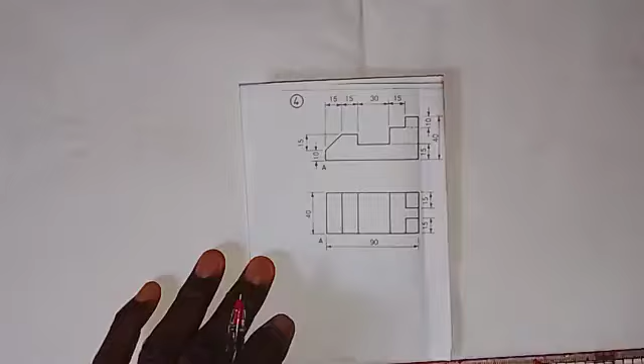Here we are going to be working on the conversion of these orthographic views into isometric view, as we are given these views in first angle orthographic projection. This is the front elevation and this is the plan. And let's talk about the dimensions on the front elevation.

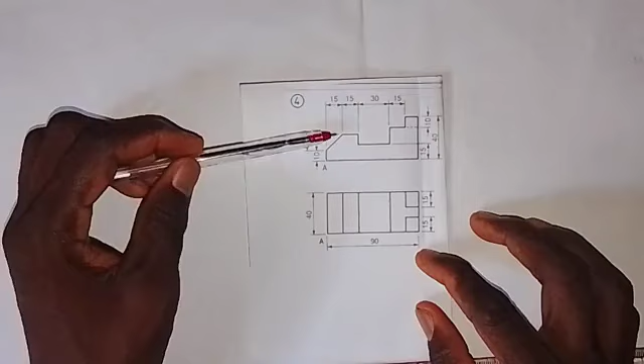So we have that from here to here is 10, from here to here is 15, from here to here is 15, from here to here is 15, from here to here is 30, from here to here is 15, and then the distance from here to here, we shall get it by adding these together and subtracting the result from 90 millimeters, as we have that from here to here is 90.

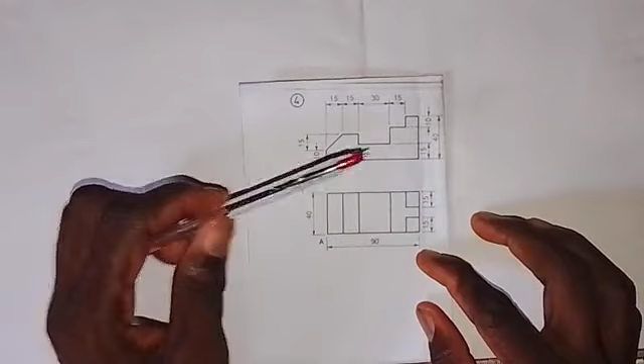Okay, and then we have that from here to here is 15, from here to here is 10. The total from here to here is 40 millimeters in the plan. So we have the total length is 90, and from here to here is 15, from here to here is 15, and from here to here is 40.

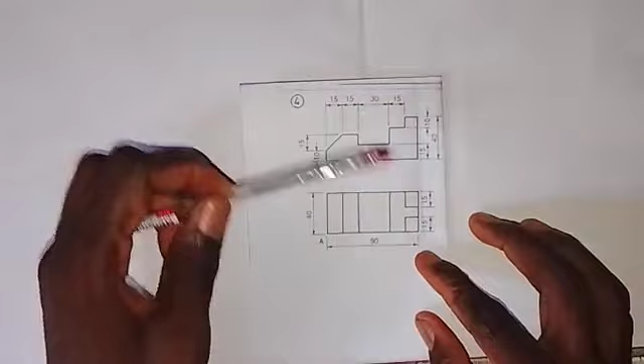Okay, so what we are going to do first is to work on the front elevation. We make the isometric view of the front elevation. Once we are able to get that done, then the remaining part will come out with ease. So let's start. We also need to take note of the lowest point. It is indicated with letter A here, and we can also see it here in the plan.

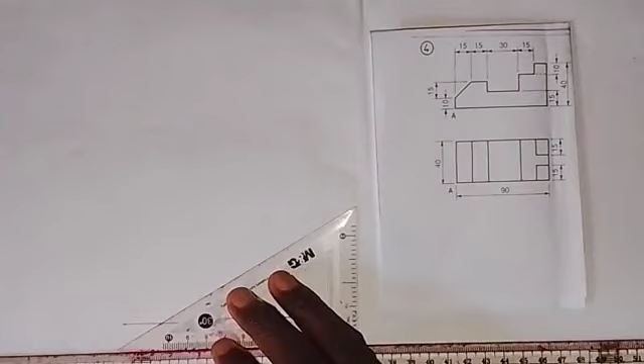So what we are going to do is to draw a short horizontal line here, and then I will take my 30-degree set square, set it at this point. Then I'm going to draw a line in this direction, and then at this point I will draw a short vertical line. So we have this now.

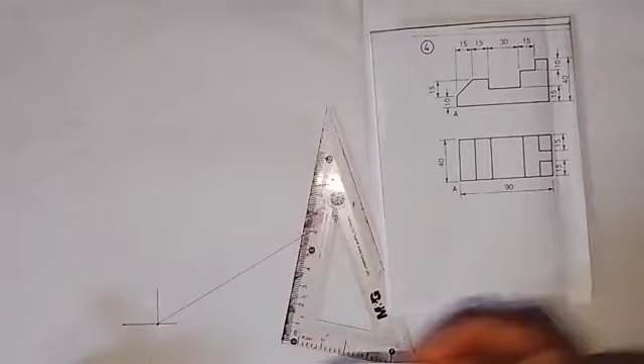Alright, so I'm going to take a measurement of 90 millimeters, which is the distance from here to here. I'll take 90 millimeters from this point to this point here. So this is 90 millimeters. Then we also need to indicate the lowest point A. So I need to write A at this point. So that is the lowest point.

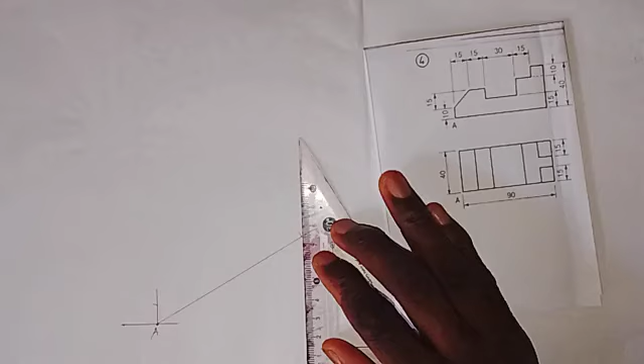And also I will take a measurement of 10 millimeters on this line, which is for this particular small line that we have here, 10 millimeters. So this is 10 millimeters here. Then I will now come to this point here and draw a vertical line at this point. So we have it like this here.

Okay. So on this vertical line, I will take 40, which is the distance from here to here. So take 40 millimeters. So here we have this to be 40 millimeters. Then I want to draw this line that we have here.

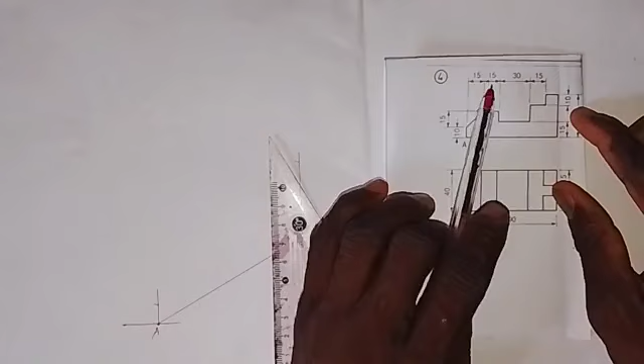So for us to know the distance from here to here, let's add these together. So 15 plus 15 is 30. 30 plus 30, that's 60. 60 plus 15, that's 75. So if you subtract 75 from 90, that will be 15. So it means that the distance from here to here is 15 millimeters. So I need to take a measurement.

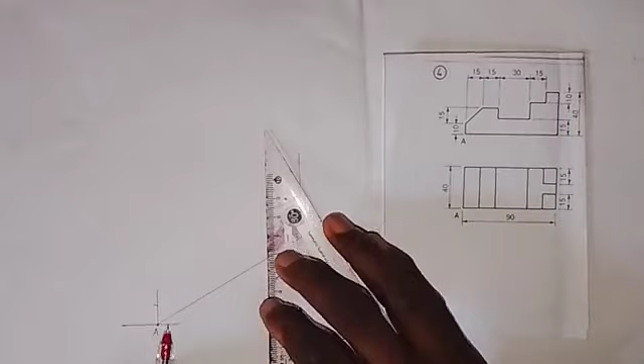Okay, before that, sorry, I need to draw a line. So for us to draw this line that we have from here to here, I'm going to draw a line at an angle of 30. So setting my set square like this, I will draw a line from here forward, and I'm going to take a measurement of 15 millimeters from this point forward.

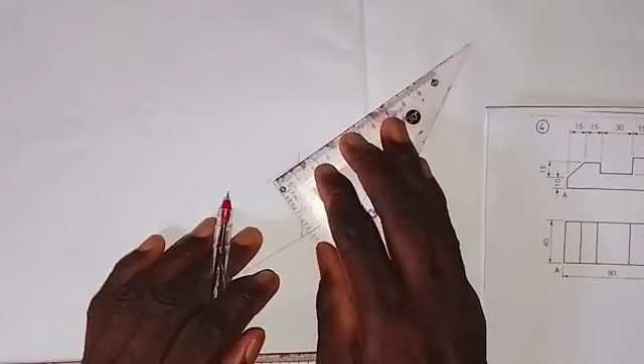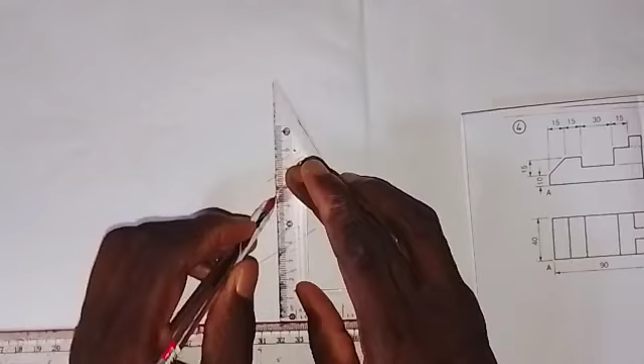So this is 15 millimeters, and then we have a vertical line that comes down like this, which is 10 millimeters long. So I will draw a vertical line at this point like this. And then I'm going to take a measurement of 10 millimeters. This 10 millimeters that I took is for the distance from here to here. Then we need to draw this line.

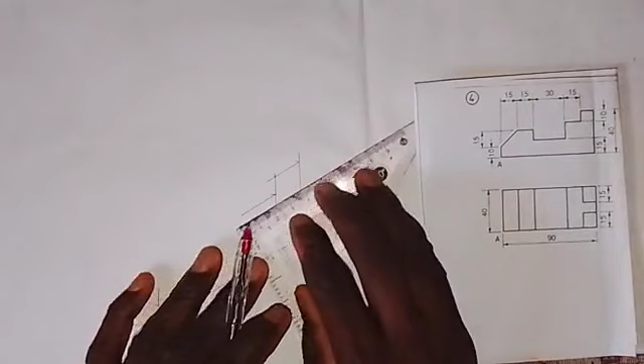So I will come to this point here, setting my set square like this. I will draw a line in this direction, and don't forget that that line is 15 millimeters long. So from this point I will take 15 millimeters forward. This is 15, and also we have a vertical line that comes down here. So I'm going to set my set square like this and draw a vertical line down like this.

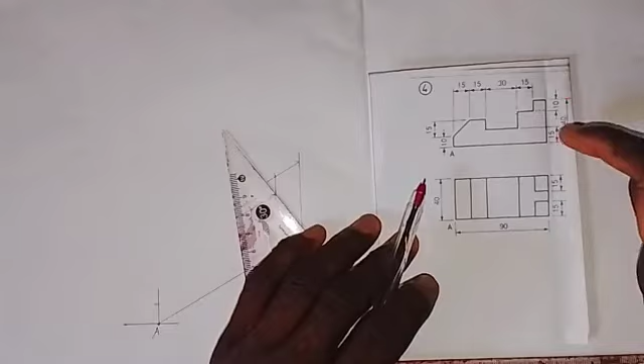Okay, so what is the distance from here to here? Okay, let's look for it. The total from here to here is 40, and we are told that from here to here is 10, and from here to this level is 15. So it means that if we add 10 plus 15, that will give us 25, and then if you subtract 25 from 40, that will give us 15.

So we take a measurement of 15 millimeters down from this point here. So this here is 15 millimeters, and then we are going to draw this horizontal line that we have here. With the set square set like this, we draw the line so it comes forward like this, and we take a measurement of 30 millimeters on this line from this point.

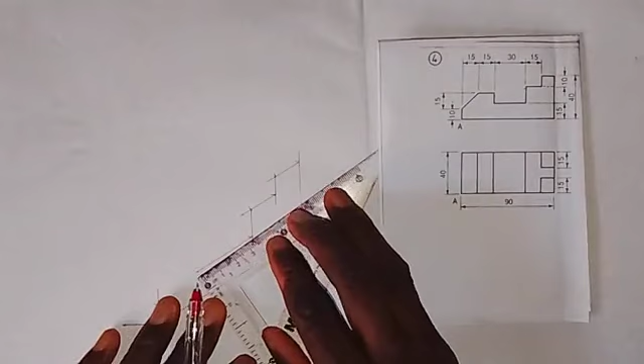Take 30 millimeters forward, this is 30 millimeters, and then we are going to draw a vertical line up from this point here. Okay, so we take that vertical line, so the vertical line goes up like this, so we have this now. All right, so then there's something that we need to do.

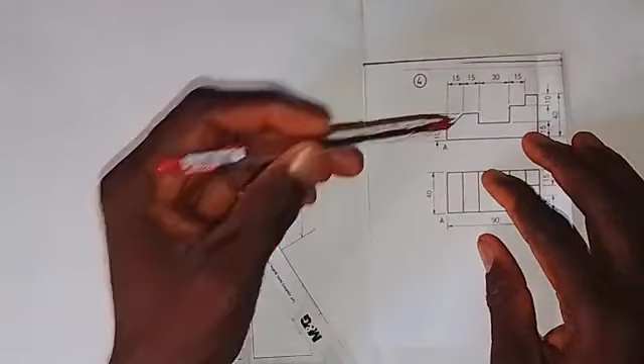Okay, so what is the distance from here up? I'm looking at this distance. So if we have that from here to here is 10, and then from here to here is 15, I'm looking at this distance to be 10 millimeters. From here to here is 10 millimeters. So I'm going to take a measurement of 10 millimeters up from this point.

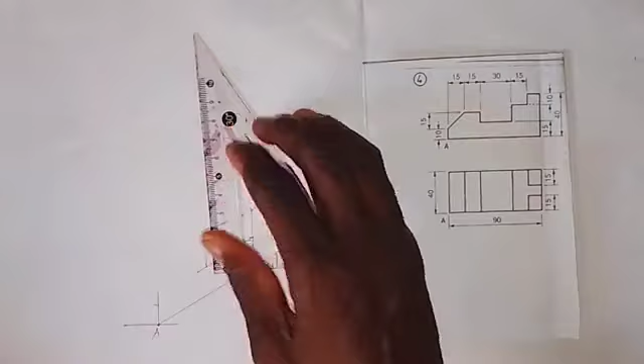This is 10 millimeters. So at this point, I'm going to draw a horizontal line. That is this horizontal line that we have from here to here. I will draw it forward like this, and then we take this 15 from here to here. So we take 15 millimeters forward here. So this is 15 millimeters.

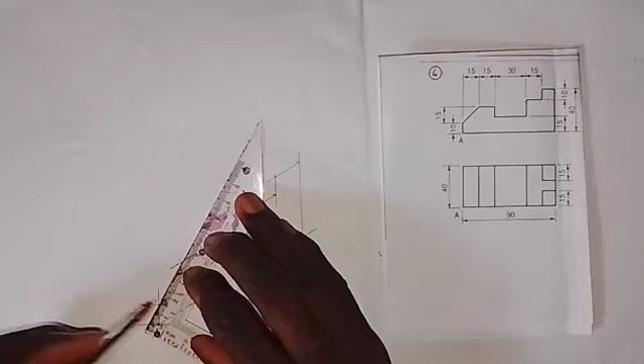So we now have that this line at 15 is connected with this line at 10. So I will join them together. Just join these 2 points together. So then we have the front elevation produced in isometric view. So what is the next thing that we have to do to make it an isometric block?

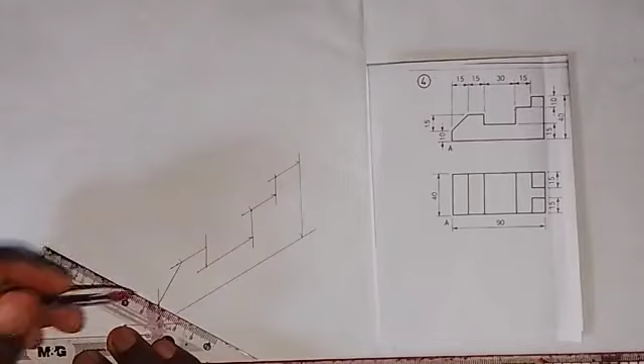So we are going to take the set square. We set the set square in this direction at this point, and then we draw a line in this direction. Then we come to this point and draw a line in this direction. Also, we come up here and we draw a line in this direction. Coming to this point here, we also draw a line in this direction. I will come to this point.

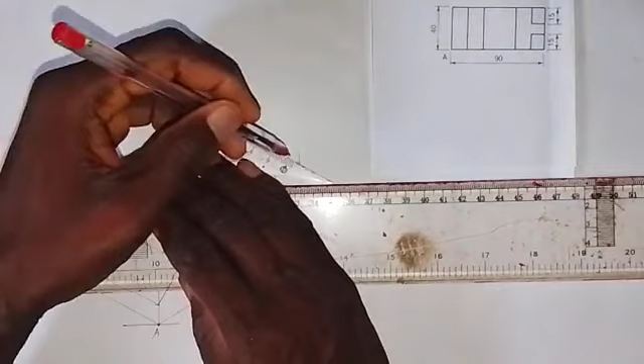Okay, just look at me. So we draw a line in this direction. I will come up here at this point and draw a line in this direction. Then I will come here also and draw a line in this direction. I will come up here and draw a line in this direction. I'll come up here also, draw a line in this direction. All right, so we have all this.

So what we are to do now is that we have that from here to here is 40 millimeters. Just come to this point here and take a measurement of 40 millimeters from here forward. See, this is 40 millimeters. At this point, draw a vertical line like this. Okay, then you can't just draw a line from here to connect to this line.

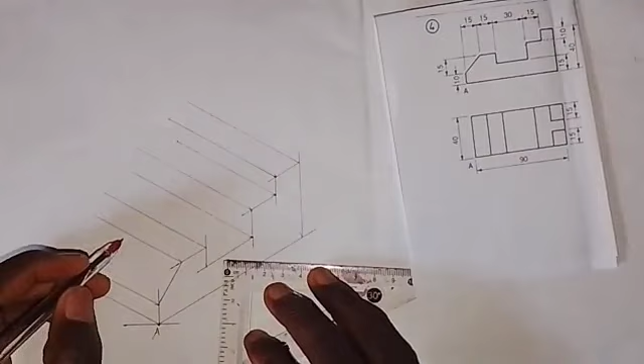You have to come here again and take a measurement of 40 millimeters. Take 40 millimeters. Okay, then we now connect this together. So we join these 2 points together like this. Then I will now come here, setting my set square in this direction. I will draw a line to connect with this.

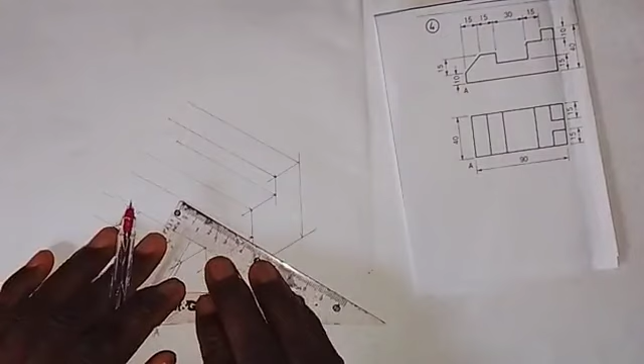Then here I also need to take a measurement of 40 millimeters from this point to this side. You can't just join them like that. Okay, so I will now come here. If I draw the line, the line will go like this. So draw the line forward like this. This is how you can do it so that the shape can come out very well.

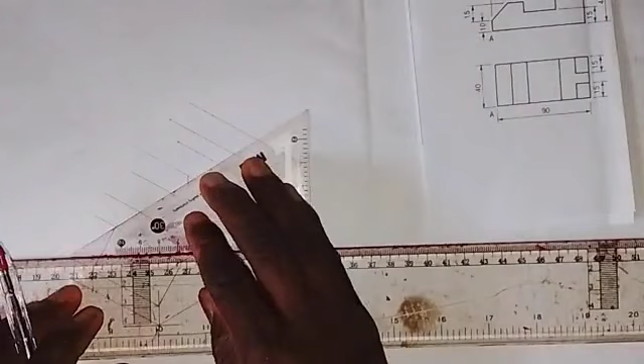Then coming to this point here, we draw a vertical line up here. And then at this point I will set my set square like this and transfer this point onto this line, and for this I will set the set square like this and then draw a vertical line, and then I will set the set square like this at this point, and then I will connect this together. All right, so you can see what we have right now.

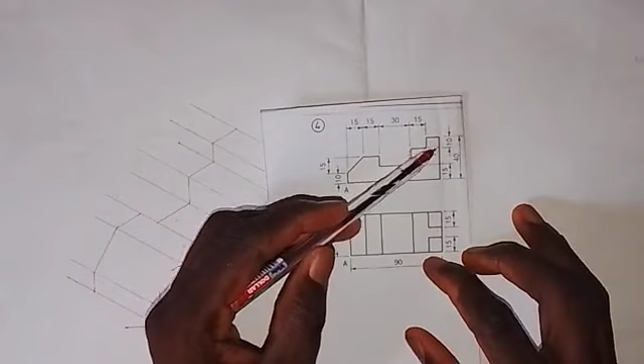Okay, so then we have a feature. So here in the middle, that's why it is hidden. There's a cut in the middle here that is hidden from us, and the depth is 10 millimeters, which is the 10 millimeters we already took from here to here. So what we just need to do is bring out the shape here.

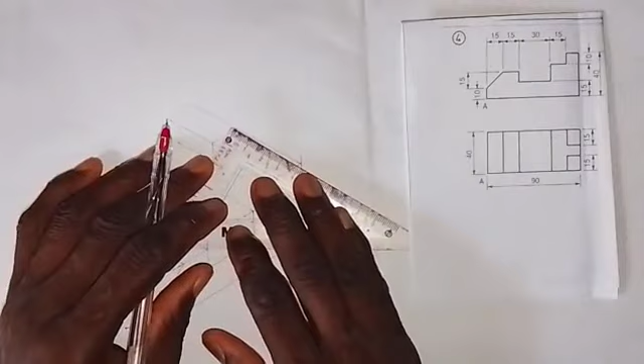So the total is what? The total is 40 from here to here. Then we have 15 from here to here, 15 from here to here. So let's take that 15. Come to this end here, and we take 15 millimeters forward, 15 millimeters to this side. This is 15 millimeters. Then I'll just take 10. So the rest is what?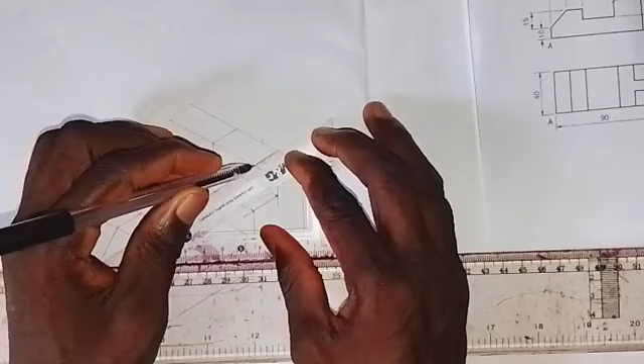Is 15. So what I need to do now is, from this point, I'm going to use my black pen to make it a thick line. Okay, so I make it a thick line at once from here to here. I will come to this point and also draw a line like this, making it a thick line. Then I will now take it from here.

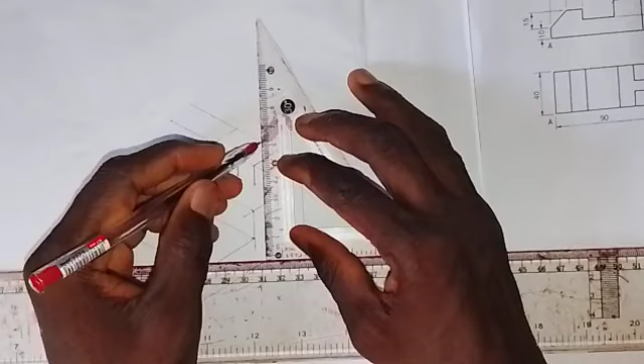Okay, I'll take it from here and then draw a thick vertical line down like this, and then I'll come here and also draw a thick vertical line down, and then at this point here, let me just draw it like this, and then I have to come to this point. Okay, so I can make it a thick line, so I will draw a line from here like this. So this line has to be drawn. Then let's make this a thick line at once.

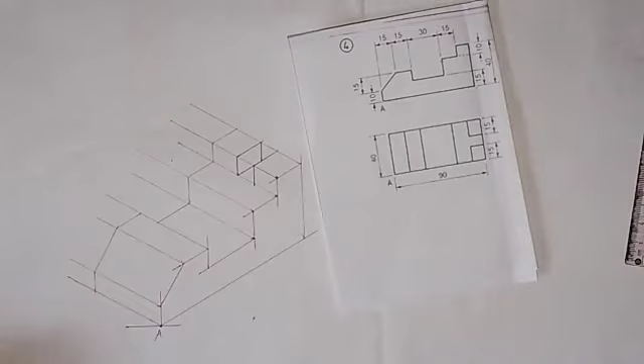So if you look at what we have here, we have completed the isometric view of this object whose orthographic views are given. So what we have to do now is to bring out the visible outlines and edges of this object by making this line a thick line from here to this end. So have it as a thick line from here to here, and we do the same thing here, making this line a thick line.

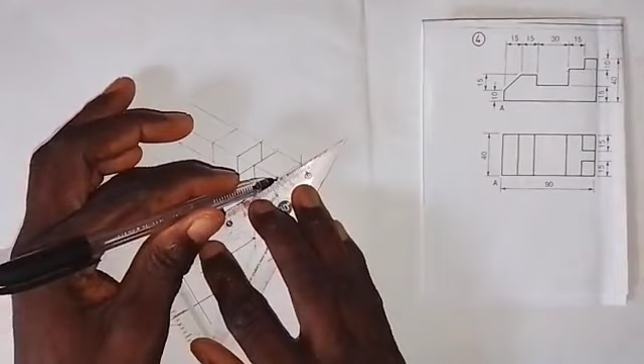So making this line also a thick line, and then we come here, make it a thick line from here to here, make this also a thick line from here to here, and we also need to make this a thick line from here to here, and this line should be a thick line from here to here, and also make this a thick line, and we also make this line a thick line from here to this end. All right, so in this direction, let's work on the vertical ones.

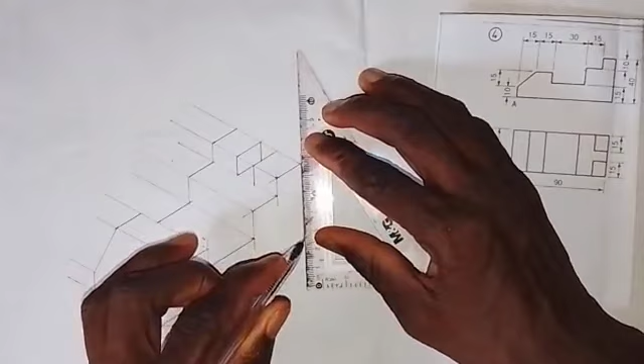So we also make this a thick line from here down. Okay, make this a thick line from here down, and we also have this one, so make it a thick line from here down. I need to do the same thing here, make it a thick line from here down, and this line should be made a thick line, and this also a more visible line, and this line here, we make it a thick line from here down. We also make this a thick line from here down.

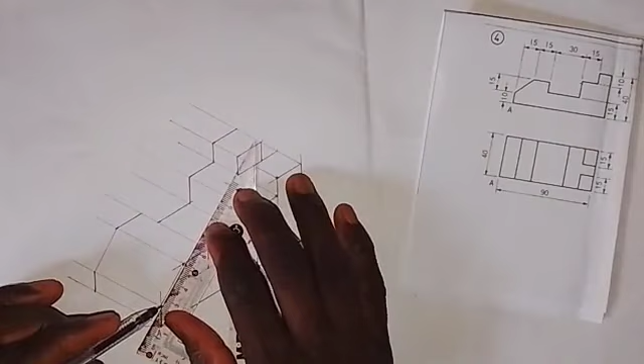All right, so this is a non-isometric line. When you have this type of line on an isometric block, it is a non-isometric line because it is not drawn with the 30 degrees set square. So that's why it's a non-isometric line. So we just join it as you see it there.

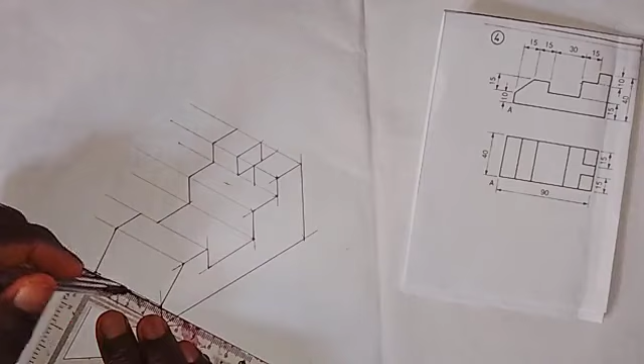Okay, then we make this line a thick line, and this line also, so we make it a thick line from here to here. Then this line also, make it a thick line from here to this end. Then we also make this line a thick line from here to here. Then this line should also be made a thick line, and also make this line a thick line from here to here.

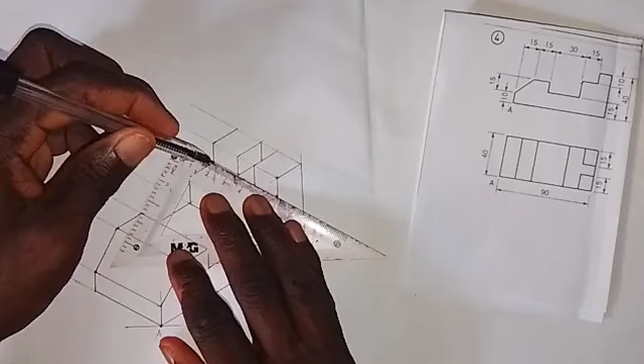Okay, then coming here, make this a thick line from here to here, and this also a thick line, so we leave the middle one, and then we come up here, making this line a thick line and making this line a thick line from here to here. Then at the end here, we make this line a thick line from here to here, and also make this a thick line from here to here.

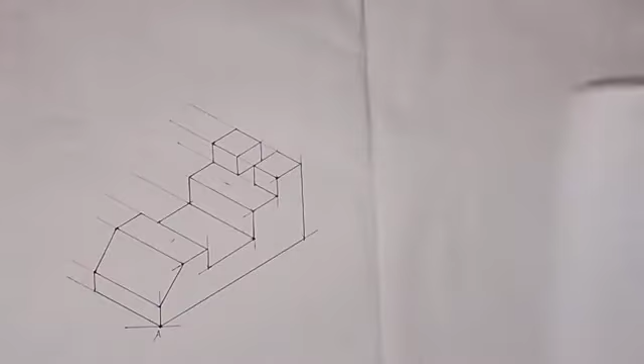So looking at what we have here, we have completed the isometric view of this object as we are given. Okay, it's as simple as I've done it here. All you have to do is practice. When you practice this, you become a master at this work.